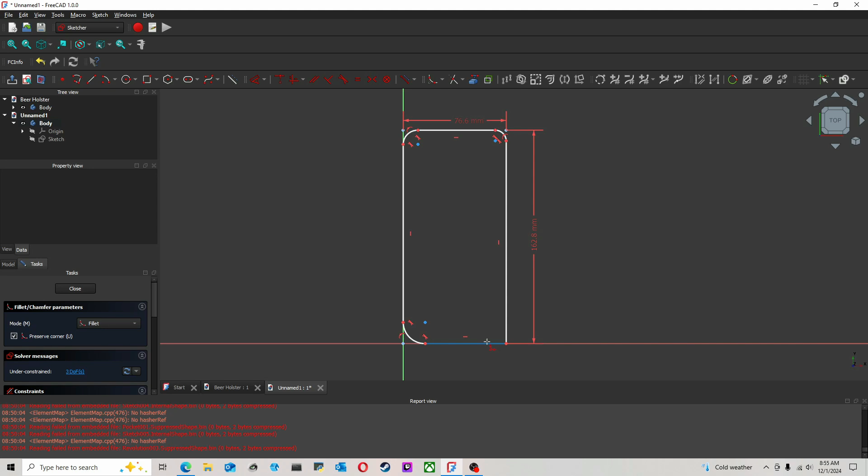So what I'm doing here is modeling up the phone just off of some quick Google reference dimensions and the phone that I have, and a pair of calipers to get started modeling up this case.

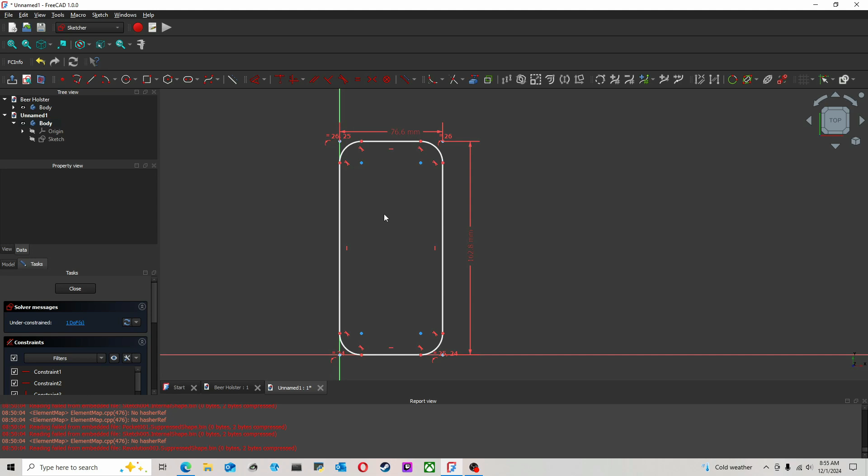If you're unfamiliar with FreeCAD specifically, and maybe you're coming over from another CAD program, the sketcher is where you draw the 2D shape, such as I'm doing here, and then extrude it into the boss of the shape you want to continue building, whatever part you're modeling.

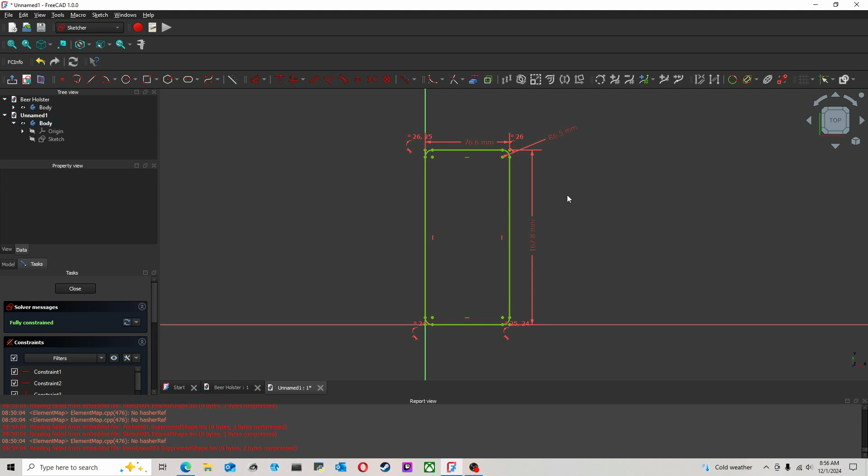FreeCAD 1.0 is definitely more refined than previous iterations. There's still a handful of bugs here and there, but it definitely works better than it did in previous versions.

And now that we got the phone modeled, we're going to go ahead and start modeling the case, once again using the Sketcher and Part Design tool.

And obviously, the phone case needs to be slightly larger than the phone itself, so the phone will fit nicely inside of the phone case.

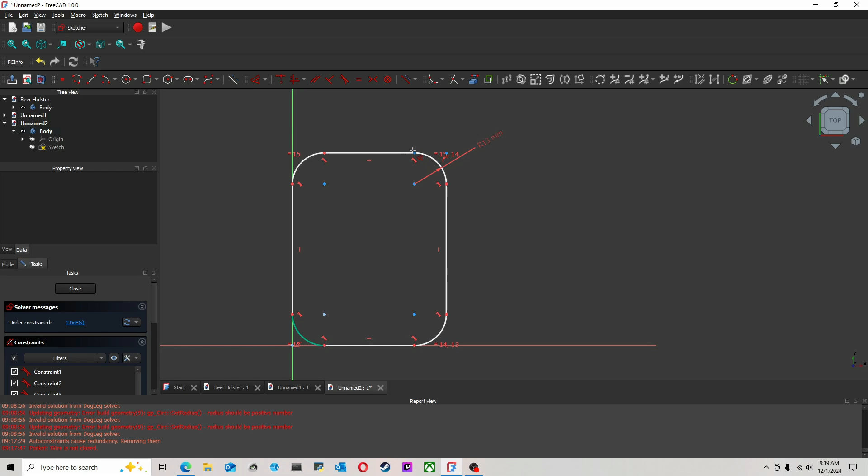So what we're going to do is go ahead and basically plug in the same dimensions we used to model the phone, except just a hair bigger in the length, width, and height, so that the phone will rest neatly inside the phone case. I'm going to do that by laying out the basic shape that I'm doing here.

And then turning this into what's called a construction geometry.

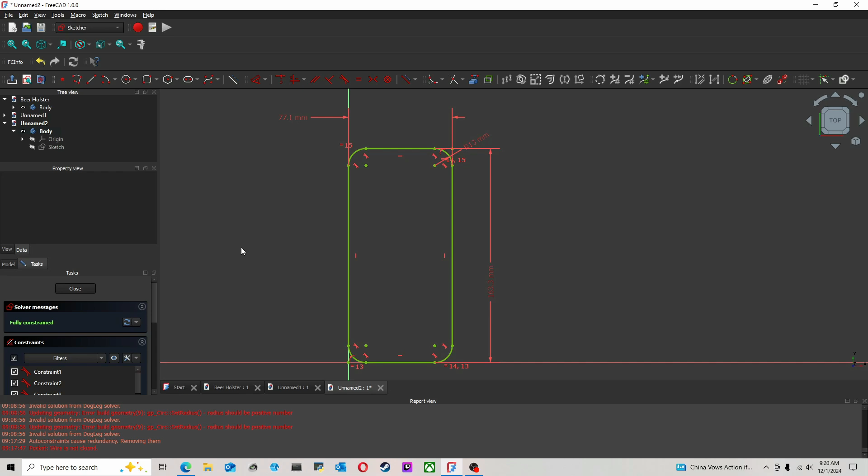And basically what I did to make sure the phone would seat nicely in the phone case was I added about half a millimeter to every dimension in length and width, so that there was a little bit of space for the phone to slip into the case.

And so this video is not three hours long, I went ahead and skipped ahead to the point where I felt I was pretty solid with this case.

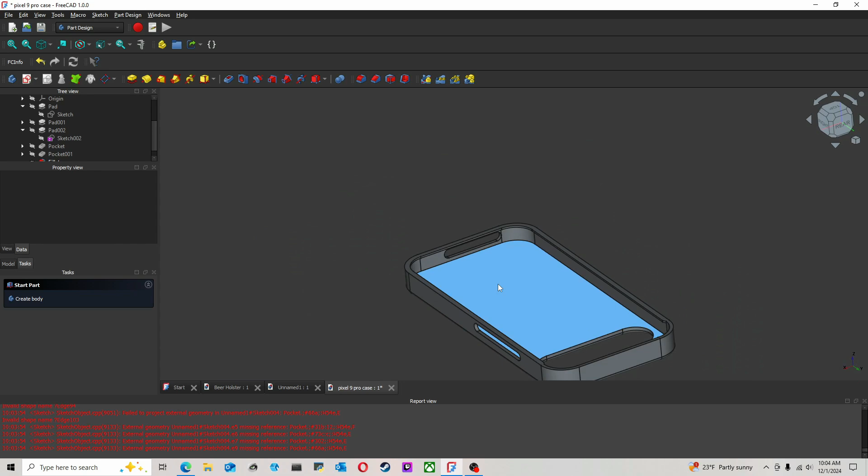Going to go ahead and add some radii, and then we're going to do the test fit to the model that we CAD'd up. In the assembly workbench, we're going to do basically a dry fit of the model we did of the phone to the CAD case to make sure we got everything right.

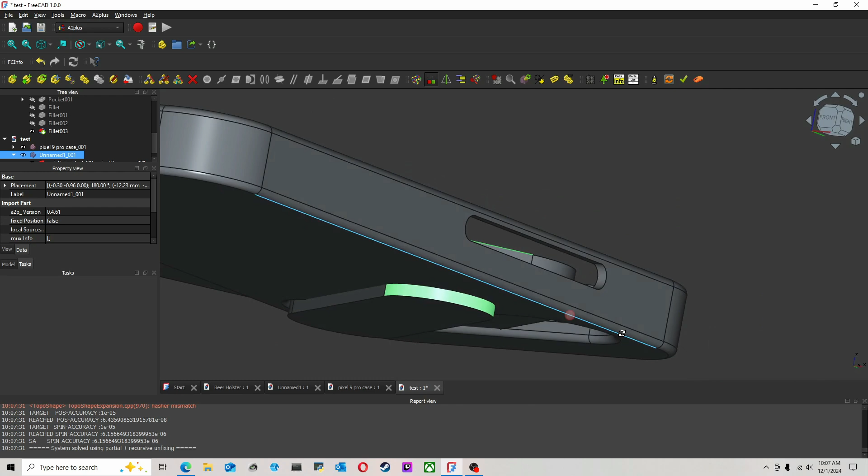And we'll see how all the buttons and charging ports and speakers and such line up to the case. We'll just speed this clip up a little bit to keep things rolling.

There we have it. Our phone is now fit into the case, so let's take a look. Yeah, I don't exactly like how that's lined up. I must have done something wrong on the case there.

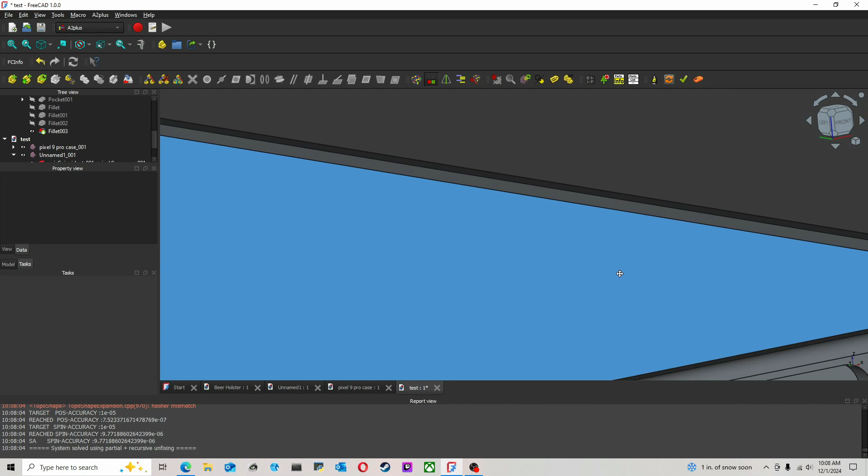This is why we do the dry fit on the computer. The edge looks good here, that looks like it's going to fit well. And then let's take a look at those.

Yeah, so those are going to need to be redone. So we'll hop back into our CAD model of the case and redo that.

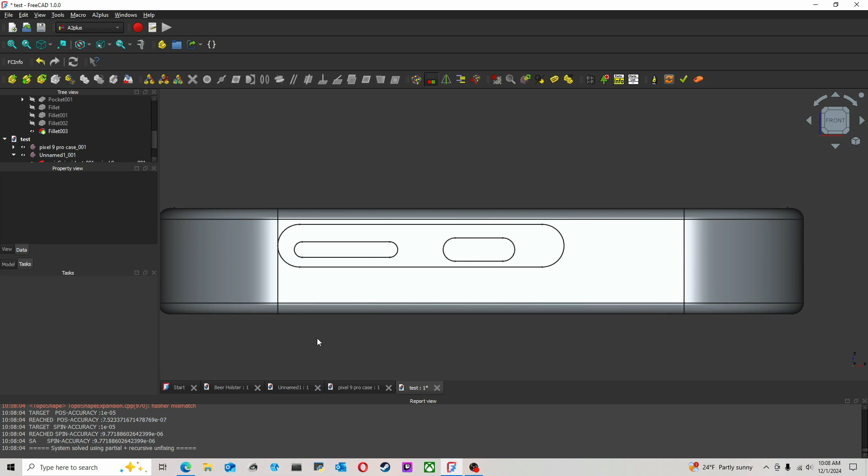Alright, so we fixed those little issues with our model. Now everything looks like it's much better lined up, which is perfect. Look at how nice and centered those charging ports and the volume rockers power button are.

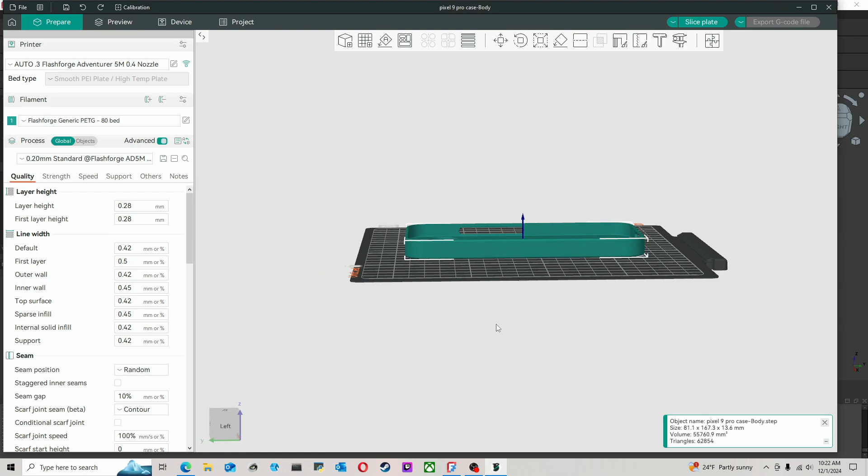So we're going to go ahead and make this real life now. And to do that, we've got our CAD model loaded up into Orca Slicer. We're going to print this out on our Adventurer 5M 3D printer using Sunlu PETG.

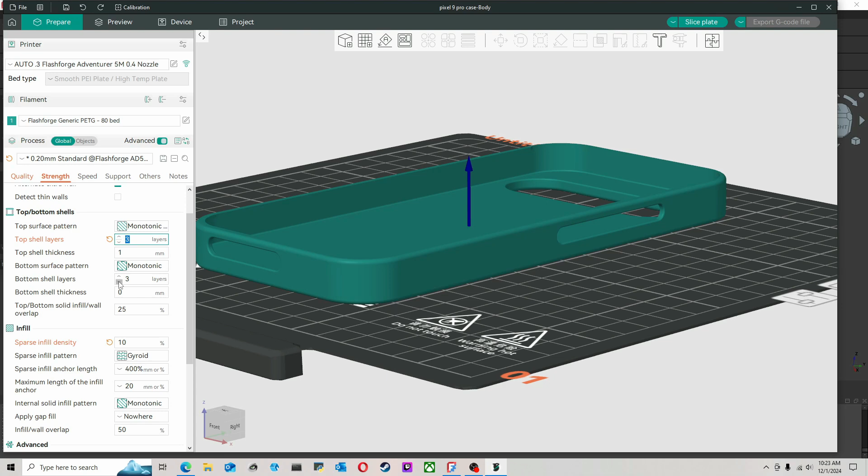Just using the default settings for PETG in Orca Slicer for the Flash Forge, just with the bed adhesion turned up to 80 Celsius. For me on my printer, it seems like turning that heat up helps me get better bed adhesion.

And we've got our file all sliced up here, and we are ready to print. In about an hour, we'll have a real physical phone holder for ourselves. And it came out pretty good.

Here's our first stab at the phone case for the Pixel 9 Pro in PETG. Some print imperfections there, but it's a first attempt. We're going to go back and try to fix some of those later.

The phone popped in really easily, as you'll see here. Just got to grab it and pop it in. We can do it with one hand. The bezel that goes around the top, I didn't go all the way around the phone, so I could push it in just like this, since it is PETG and not a flexible TPU.

The one issue I had was with the volume rockers, I didn't really leave enough clearance, and they're kind of hard to get to.

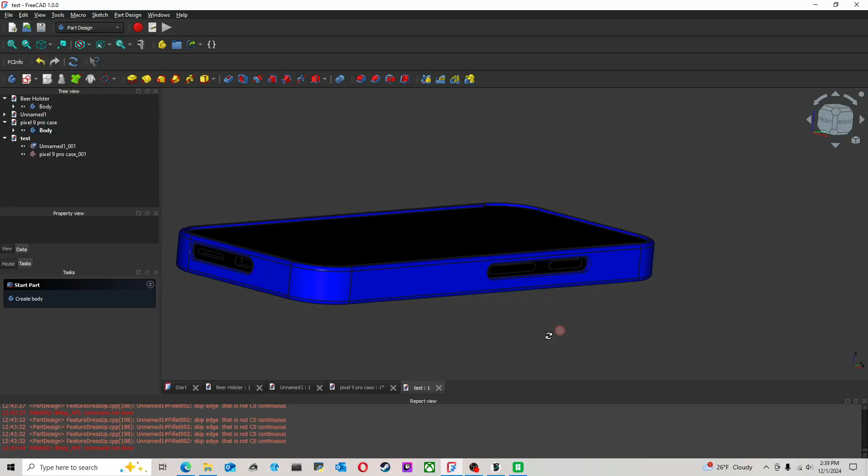So we hopped back into FreeCAD, and we're going to add a larger chamfer to that edge and make those reliefs a little bit bigger, just like this. And that'll make the phone case easier and more practical to use that volume rocker and power button on.

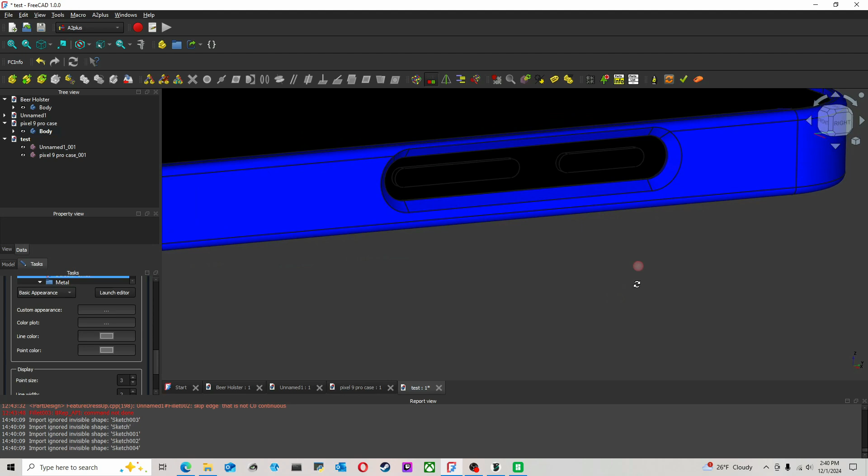And once again, we're going to throw that in our assembly and check that fitment before we go ahead and print. And now that it looks like we're happy with attempt number 2, we're going to go ahead and throw it in our slicer, slice it up with the same printer settings, and go ahead and print.

So let's go ahead and pop this out of the V1 case for the V2 case. As you can see, I can do that with just one hand, which I think really shows how well that case fits around, just snug enough to the phone, how well it form fits that phone.

And just like that, there's our V2 case, almost like I had it pre-printed and ready to go. And this is going to be in Anycubic Blue PETG. Print came out looking really nice off of the Flash Forge. Little bit of a seam there on the top layer, but nothing bad.

And we're going to pop in our phone again with one hand, just like in the V1 case. It's going to hold it nice and snug, just like that. And that's V2. Power button and volume rocker, much more easily accessible.